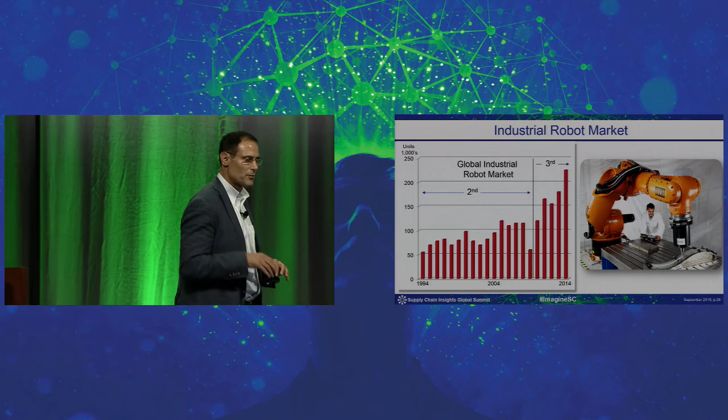Let me start with this graph, which is the industrial robot market over the last 20 years. You can see from the chart it's the number of thousands of units. If you look at 2014, we shipped about 225,000 robots globally. You can see there's a pretty pronounced change before and after the financial crisis. Robots were averaging about 75 to 100,000 units a year globally, and it jumped up to where it is now, largely driven by China.

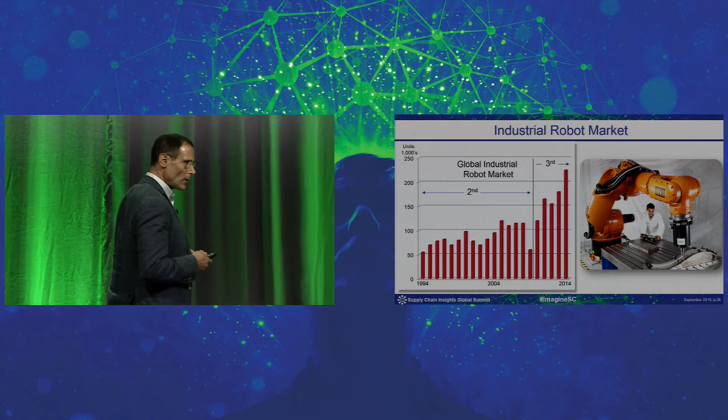So let me go back historically and kind of go back to the beginning. Do you want to play the tape?

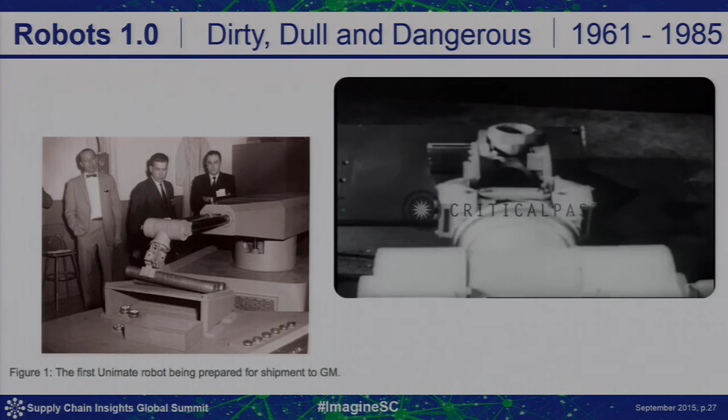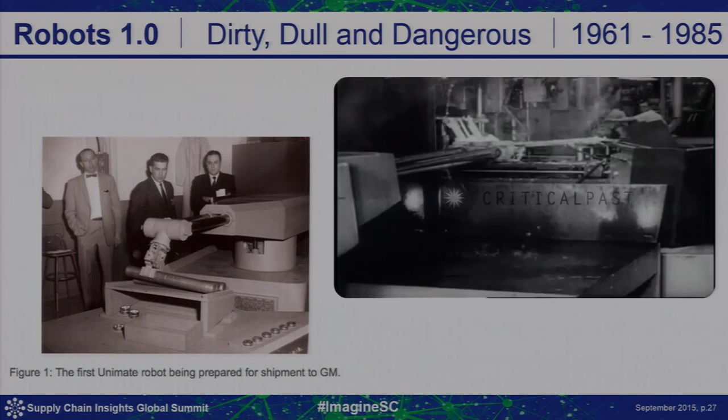Automation's newest contribution to man. This jack-of-all-trades robot is called Unimate, and it handles dull, difficult, or dangerous jobs with equal aplomb. His electronic memory helps him learn up to 200 separate movements. He has muscle, can pick up 75 pounds, and can stand extreme heat, cold, noxious odors, toxic gases, and radiation. He's accurate to 5/100ths of an inch. Not exactly sloppy, right? Perfect for heavy work or labor which may invite injury, Unimate is displacing 10 men at a time who are retrained for better jobs elsewhere in the factory. He costs $20,000 or rents for $7,000 a year. He never complains, asks for a promotion, or demands a pay raise. He doesn't break, bend, or burn, and should make some other Unimate a perfect husband. Or maybe wife?

Yes, Jim, I think I've got a date for Baxter, so you're lucky.

Now, robots celebrated their 50th anniversary a little while ago. The picture is the first robot that went into factories, went into a GM factory, and really the beginning of robots was about dirty, dull, and dangerous. I characterize this as Robots 1.0. And if you go 25 years later to the peak of that segment of robotics, it was really about superhuman capabilities, the ability to do things that people couldn't do. This is a welding line at a General Motors plant.

I think as any of us older people would know, baby boomers, you didn't buy a car that was produced on a Monday or a Friday back in the 70s or early 80s because the welding wouldn't have been done right. But robots fixed that problem and really delivered a higher level of throughput. But they had their limitations. And I think this Robots 1.0 era closed with the layoffs at General Motors in 1986, really because GM thought robots were the answer.

Roger Smith went to Japan in the late 70s, saw that all the Japanese car companies building really good quality cars were using robots, and thought robots were the answer at General Motors, and bought a robot company to do it. Lo and behold, six years later, they realized it actually wasn't the answer because the quality wasn't there and the processes weren't right. So there was a retrenching in the industry, which gave rise to what I think is the era of productivity, the Robots 2.0 era.

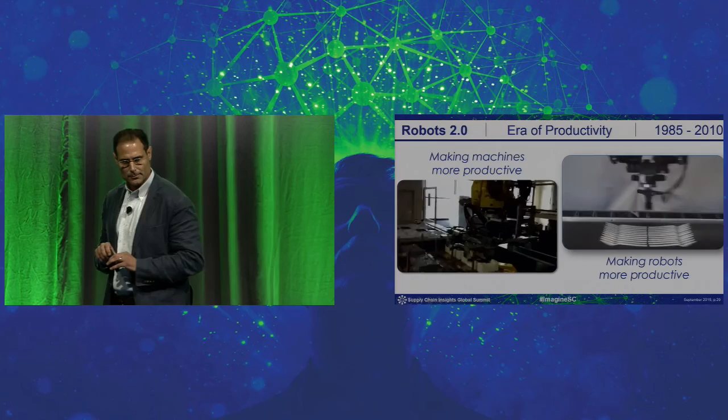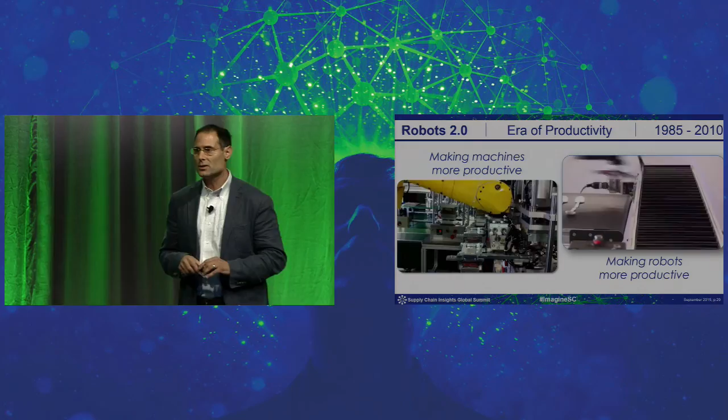These two videos are a good example of this. This was an era that went from the mid-1980s to right about the financial crisis. The robot on the left is working with machines, and it's really about productivity, making the machines more productive. There are lots of examples connected to CNC machines, molding machines, and other process tools where the robot's consistency really delivers a high level of productivity improvement.

The one on the right is, I guess, the edge of the envelope in terms of robot performance. This is a kitting job where they're packaging cutlery, and you could see robots were just at a level of performance that weren't to be matched across the industry.

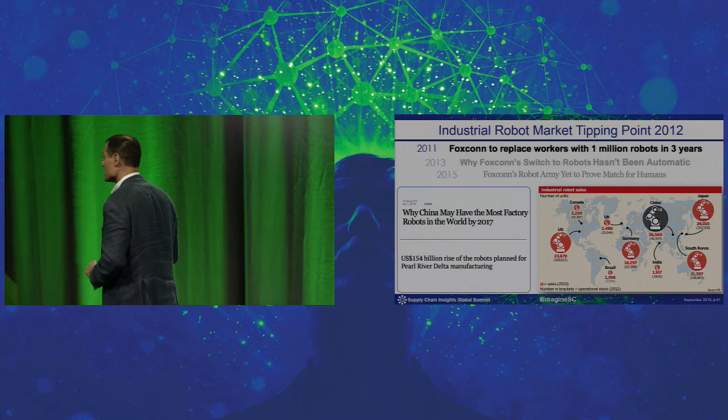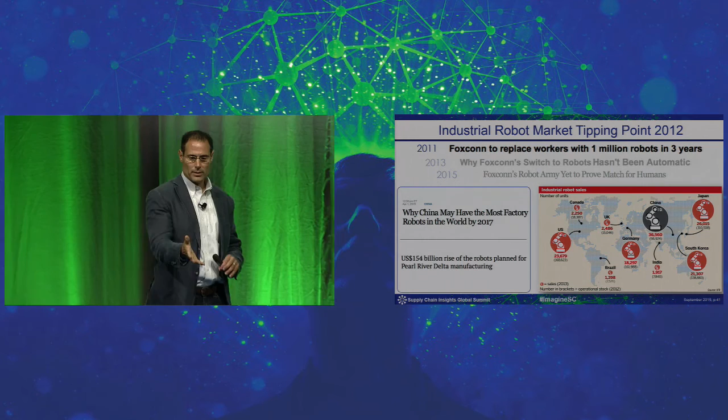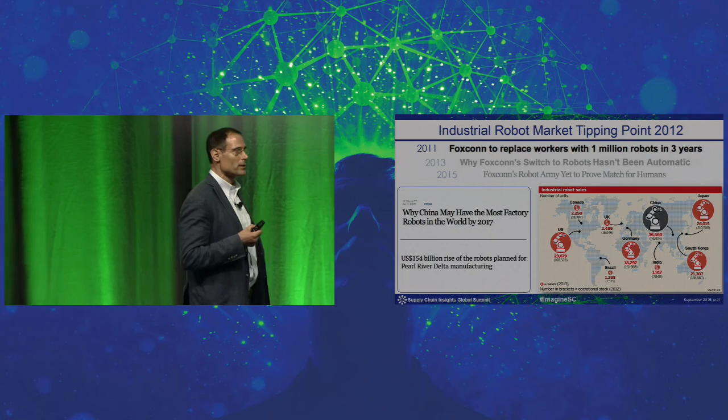But something else happened in the interim: in 2012, China put in more robots than any other country in the world. And in 2013, it put in 50% more than every other country in the world. According to this chart on the left, by 2017 China will have the most robots installed in the world, making up for 50 years of history in Japan, the US, and Germany, erasing that in 5 years. So the world is certainly changing, and it's driving a new paradigm in terms of how to think about manufacturing and the value of automation.

So it brings us to the third era of robotics, which I call the era of interchangeability, the era of flexibility. Interestingly enough, it's not the robot industry that's driving it or making it possible. What's making it possible is a host of adjacent industry technologies, from computing to mobile computing to gaming to networking, that's delivering a new set of technologies that can now be built into new, smarter, more flexible, more agile robots, kind of like what Baxter is. And this enabling is opening up what I consider to be the next era of robotics.

So what does one of these look like, or what are the capabilities that it has? I think there's kind of 6 core capabilities that I think really are the drivers for the next generation of robots that we've seen being put in our factories.

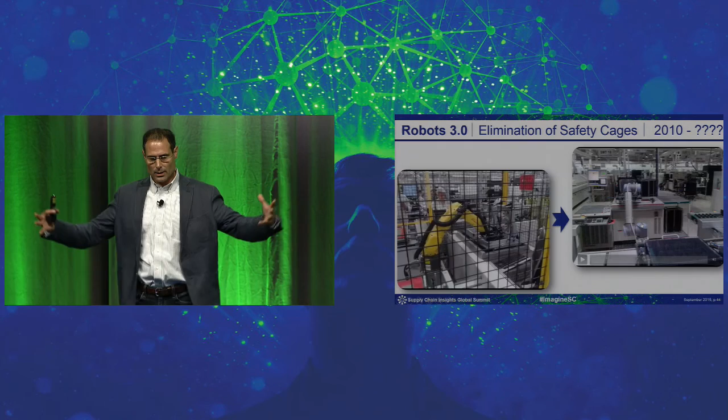You want to play the videos? So the one on the left is what I consider to be a Robots 2.0 application. It's an industrial robot, and because it's not safe, there's a big safety cage around it. You can play the one on the right as well.

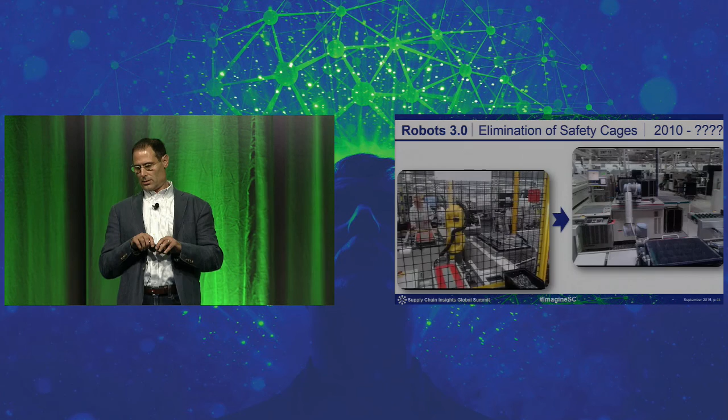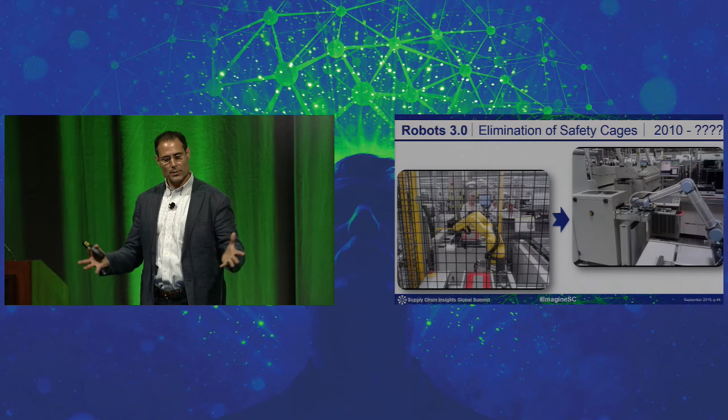It's doing a simple in-circuit test handling application. The robot on the right, which—you want to go back one? Is it not connecting? Oh, there it goes. Is doing the same task. Nothing magical here, except that there's no safety cages. There's no infrastructure. There's a lot of money spent on the one on the left.

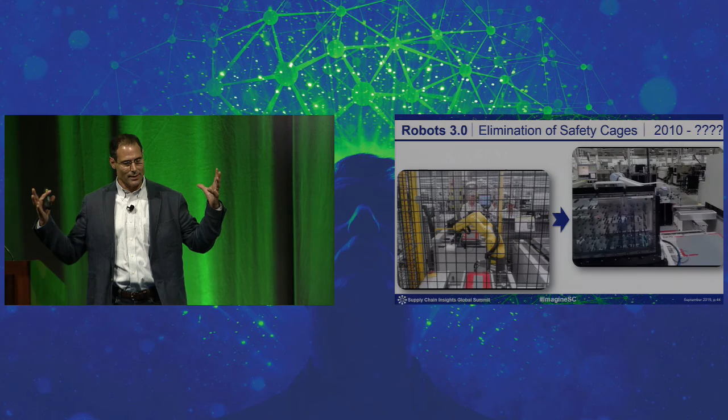It's a lot more inflexible. When we want to make a change, we've got to reconfigure what the cage is. So you limit—so one of the value propositions of this new generation of robots is being able to be put into application with a much lower level of infrastructure. Same application, same technology, but probably about 30% less money and a lot more flexible.

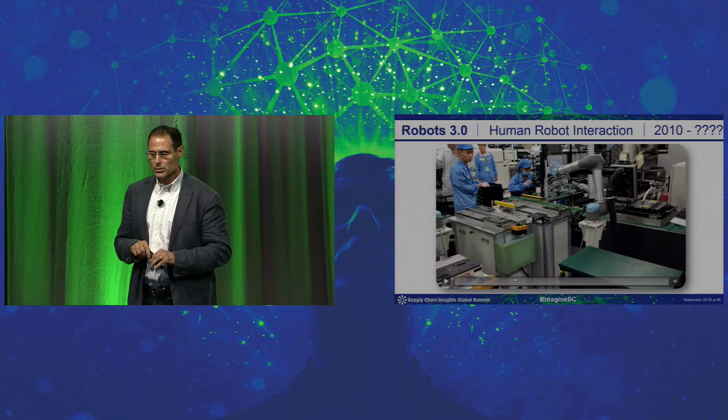Then if you go to the next one, this is human-robot interaction. In this case, not only are there no safety cages, but people are introduced into the environment, so people are able to work alongside the robots.

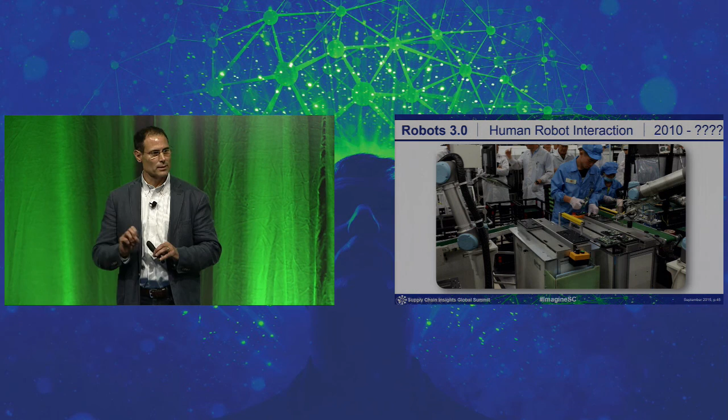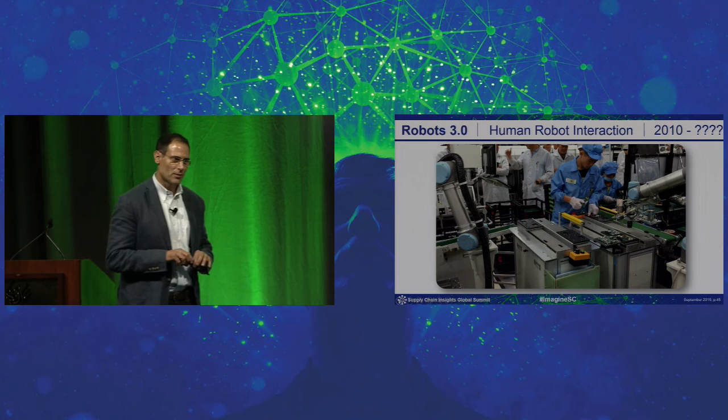In this case, we've got two robots working side by side. We've got people taking things from the robot's work envelope, inspecting it, maybe putting it back, and it allows us to have this mode of collaboration now between people and robots, because we're not going to just replace people with robots. The factory of the future isn't the lights-out factory, at least certainly not in the electronics industry. It's a factory that's a combination of people and automation working together to solve problems—automation solving the problems that make sense for automation to solve, and people bringing their intellect and knowledge to help solve those problems.

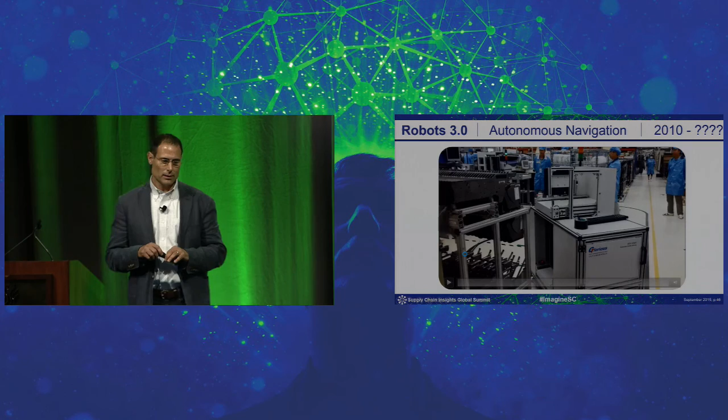Play this video. And then the third capability I'll highlight: this is a little AGV that we have that does line-side replenishment in our factories. Nothing too sophisticated—this is a technology that's just maturing today in terms of autonomous navigation, but I would expect as we think toward the future, this ability to have end-to-end traceability by having smaller lot sizes delivered to the line through autonomously navigated robots is going to be an important characteristic. It's something that I think over the next several years will become a much more important part of our automation.

So that's robots. What does it mean for the supply chain?

I think it means several things that are important. Again, I'm not a supply chain guy, so I can't take a lot of credit for being a visionary or an expert in terms of how to re-architect supply chains. But if I think about what robots' capabilities are, and this new, more intelligent, more collaborative, more flexible platform, it means that we can now deliver smaller lot sizes to the line. Just-in-time delivery. It gives us the ability through fully navigating robots to have end-to-end traceability of materials throughout the factory. When materials get to a station, a robot's smart enough to be able to qualify the material and ensure that what goes into the assembly is actually right and validated.